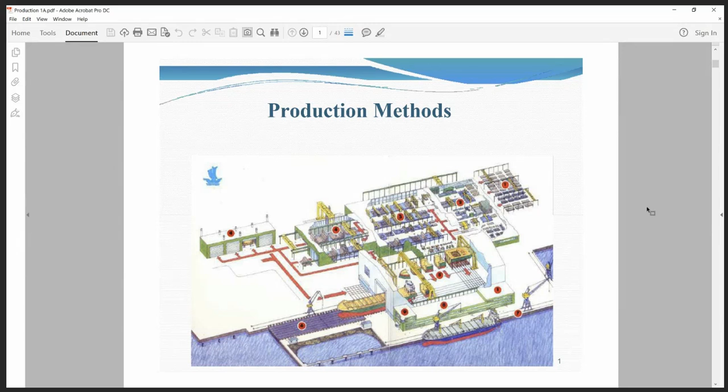This is much more about the production unit. So what we will discuss today is much more the production unit than really the design and calculations of the ship. I will give you a small overview of the economics context, the type of shipyards, the launching system, meaning how we can put the ship in water, and the method of construction and the technological evolution of the construction.

Concerning the shipbuilding industry, it's consuming a lot of manpower, and some of this manpower is not skilled, and some is skilled. About half of this worker, this manpower, have a certain skill, and the rest is just only a worker.

Actually, there's a tendency to delocalize the construction. Why? Because, as I told you, this industry consumes a lot of manpower, and the manpower represents a big part of the construction of the ship. So people are trying to find where the manpower is less expensive, with some skill - the skilled manpower - and then they delocalize the construction there.

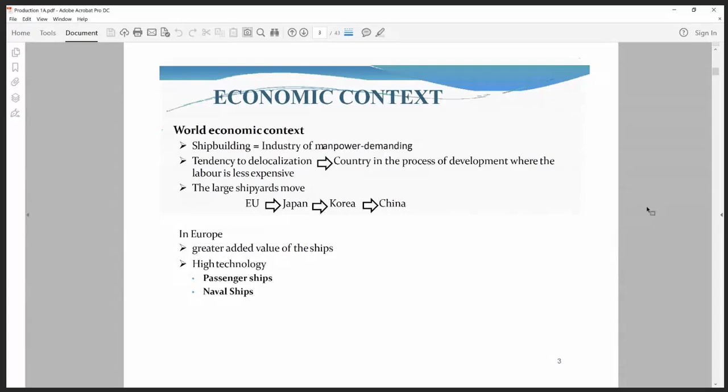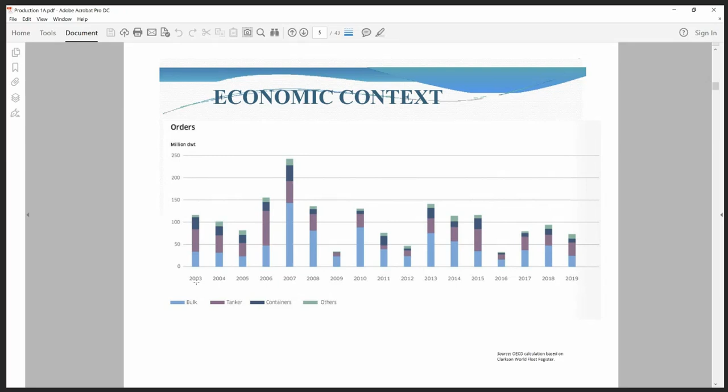We can see that the majority of ships built up to now are bulk carriers, tankers, and a small part containers and other ships. The biggest market is for the bulk carriers and the tankers.

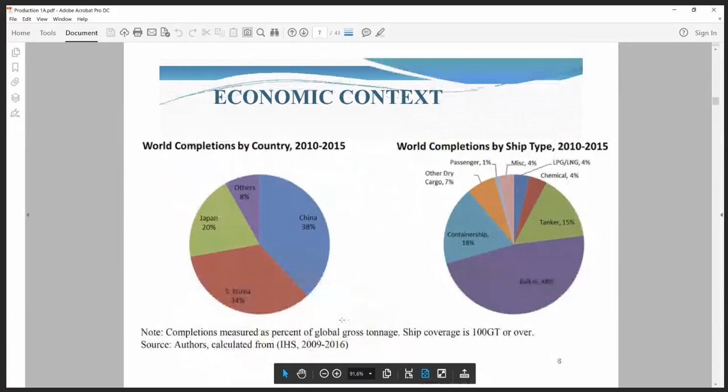So you can see that the majority of passenger cruise ships continue to be built in Europe.

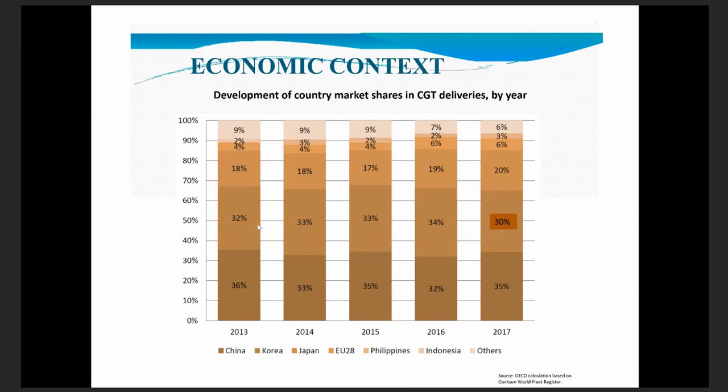We can see that the major part of ships for transportation, bulk carriers, crude oil carriers and so on, are mostly built in China because they have the larger market. They also have lower costs, less expensive than other countries, which is the reason why they have a lot of the market.

It's equivalent to the same ship built maybe 10, 15, or 20 years ago. The only new things might be the navigation materials and some small details, but the form, the way to build it, or maybe a slight increase in capacity, stays exactly the same. It's not really completely new technology inside those ships.

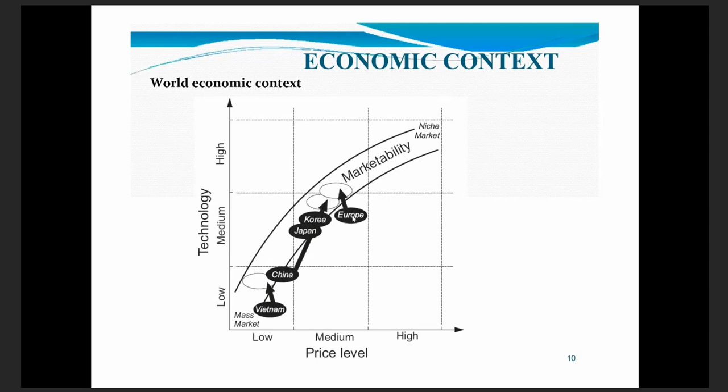That's the reason we are at low prices and low technology. In Europe we are at more medium prices and more or less high technology, and also in Korea, because now with Japan they are starting to try to build passenger ships and LNG ships, which are a bit more technological than bulk carriers.

So for shipyards, we have different types. Shipyards can be classified according to geographical situation, according to the size of ship we would like to build, according to commercial and industrial objectives, and also according to the qualification of labor that we need. This will show the type of shipyard and its position in the world.

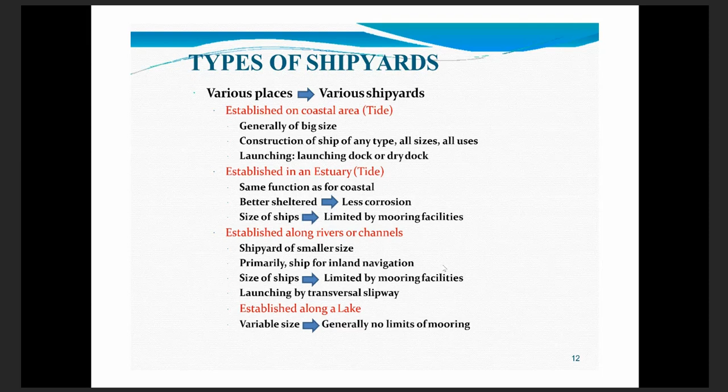The shipyard, you build the shipyard according to the ship that you would like to build. So it's mean you need to have, if you would like to build larger ships, the devices to be able to build larger ships. For example, the lifting capacity. The lifting capacity is really a crucial point for the shipbuilding, and also for the economics. We need to have a very good capacity of lifting.

Why? Because we will see it later, this capacity of lifting will help us to make the biggest blocks. And when we build your ship, you build it with different blocks. If the capacity of lifting of these blocks becomes bigger, it means you will decrease the number of blocks. And if you decrease the number of blocks, you will gain time, and you will have the possibility to do the work faster than if you have double the blocks. So we will see what it means, blocks, later in this presentation.

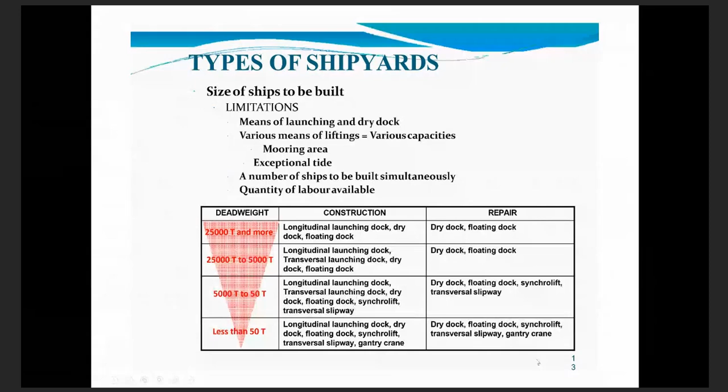So we will see all these devices in just a few slides. The commercial activities that make profit to build the ships - for that, we need to have a great quantity of work. Sure, it's normal. To be able to invoice the cost of the labor, very high cost of labor.

This is, if you want, our problem here in Europe in general. Receive more frequent grants. And what it means is that in some countries they give grants, if you want, to the shipyard, but here in Europe we are not able to do it because we have the European law, which is very complicated to do it. But some countries do it in a different way.

For example, in Italy, in France, they give, if you want, the grants to the shipyard by building a naval ship, because Fincantieri does the naval ships for the Italian Navy, and at the same time does commercial ships, passenger ships or something else. That's the reason why the Italian Navy said all the military ships should be built in Italy.

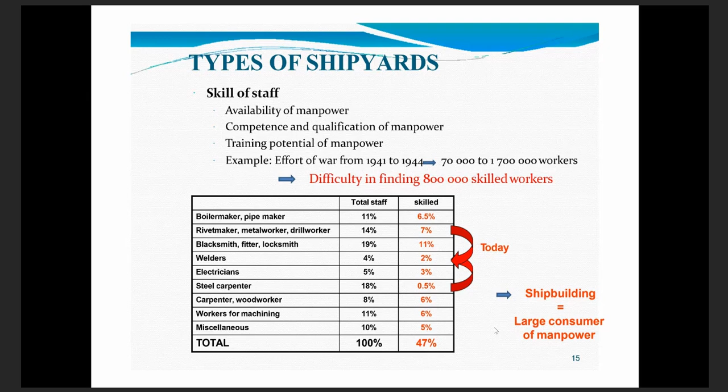And now, as I told you, we have 4 points. The first one, the localization or the geographical position of the shipyard. The second point was about the capacity of building: if you would like to build larger ships, smaller ships, and how many ships you need to build at the same time.

The third point was the commercial objective of the shipyard, and the fourth point was about the skilled people, or the workers working in the shipyard. And so I explained the different points of view about these 4 points.

And now we will go into the layout of the shipyard, how we will build and how we will organize the shipyard, and how shipyards are organized. So we can see that, for example, if you have a restricted water frontage, the shipyard is a straight line flow, because the water frontage is very small, and so it means all the flow of materials is in a straight line.

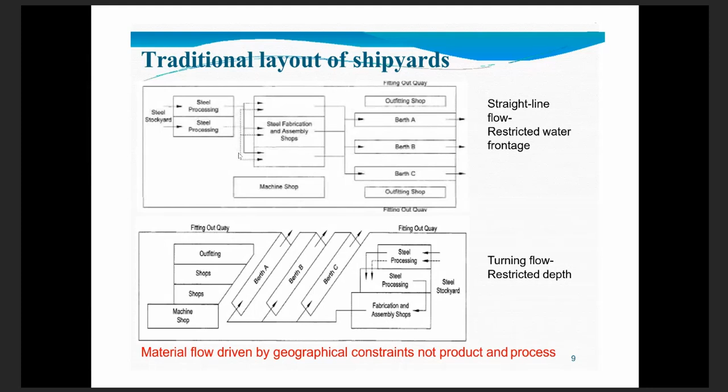So this is in Sweden, and this shipyard is designed for a straight flow of materials. And how is it straight? You can see that the stock is somewhere here. You have the shops here; these are the shops to make the elements, panels, and blocks. And then you have the berth, and then you can put the ship outside the berth here. So this is a straight shipyard. You can see everything is in line.

Okay. So this is the shipyard in Sweden. And in Japan, the majority of the shipyards, don't ask me why, have the T layout or U layout. And what does T and U layout mean? For the T layout, it means you have the outfitting all the time near the quay. Okay.

So you can have here the steel stockyard somewhere here. After that you have the shops for assembly and fabrication, and then you have the machinery shops, and also some part of the outfitting, and you can see all of them. The outside part is perpendicular, if you want, to the berth.

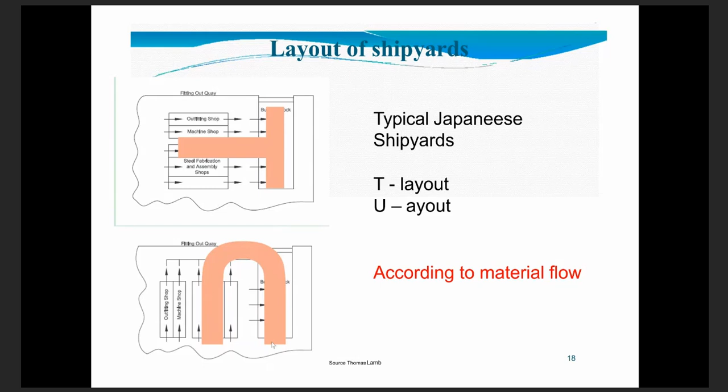But for the U profiles, you can see that they have the U. Why? Because if you follow the arrow, we can see that the flow is forming a U. So it means you have the flow, and then you turn, and you have the berth here. It's perpendicular. It's a U layout. So it's these two layouts, according to the material flows.

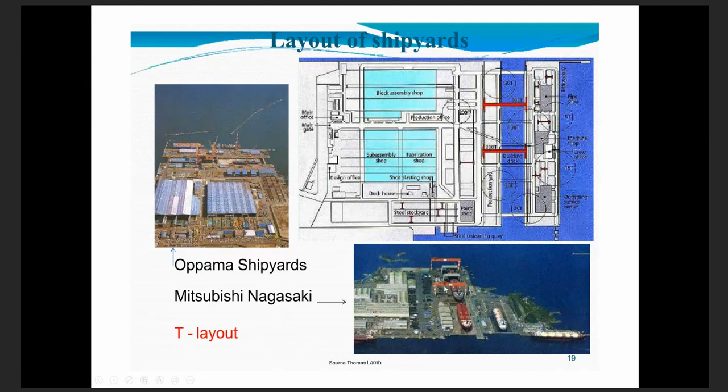And here exactly the same. So you have the shops here, and then you have a berth here. It's also a T layout.

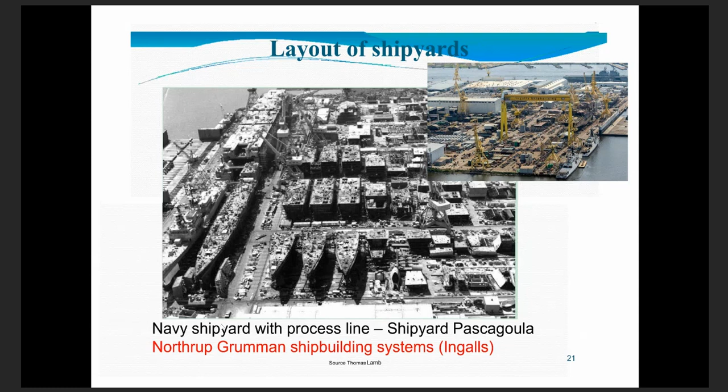As I told you, the ship will be built by blocks, and with the compact shipyard, when you finish the blocks they are directly sent to be assembled in the dry dock. So it means you don't have the possibility to leave them a long time outside the dry dock.

Also, the advantage of such a compact shipyard is that everything is connected together, so the worker doesn't need to go outside to do their work, which is a very good thing. Why? Especially when you have bad weather, for example in the north of Europe,

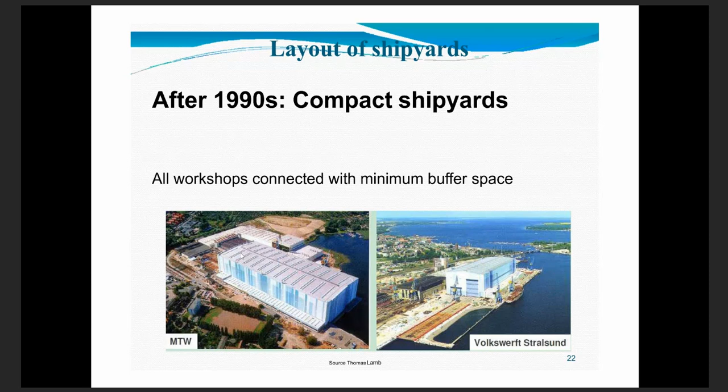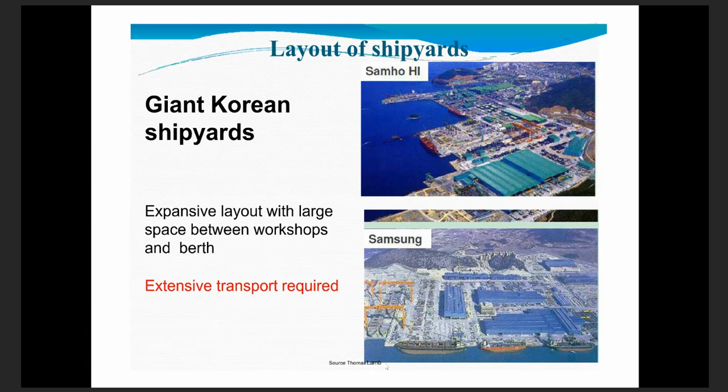And all these shipyards are very large, and extensive transport is required. They need very extensive transport. Why? Because you have a very long distance between the shops and the berths. But I think they are very efficient shipyards, and they are able to deliver 3 or 4 ships every month.

Okay, now we have already seen the shipyards, the layout of the shipyards, and now we would like to see, as I told you, the launching and setting dry of the ship in the shipyard. I told you that you have what we call irreversible devices and reversible devices. Irreversible devices mean that you are not able to take the ship out of the water. You can put it in the water, but you cannot take it out of the water. So this is what we call irreversible devices.

Okay, the longitudinal launching is an irreversible device, and transversal launching is also irreversible. For reversible, you have transversal slipway, dry docks, floating docks, Syncrolift, and gantry crane. And now I will explain each device and give you the advantages and disadvantages of each device. For the irreversible devices, that means the longitudinal launching. So you can see what it means.

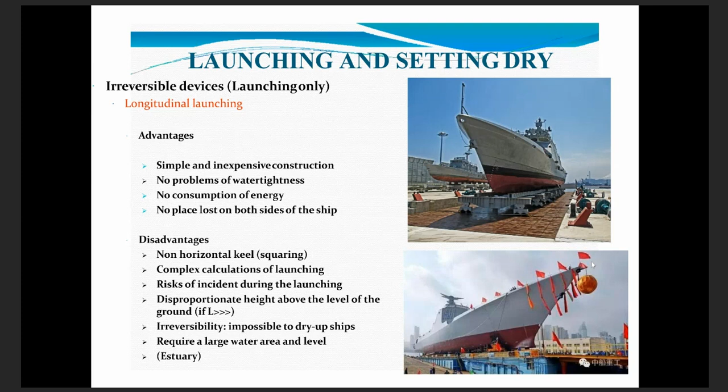And so you can use this kind of system when you are in the estuary. You cannot do it in the coastal area, because you also have waves, and the waves will complicate the launching and increase the risk of accident. So this is the reason why we use such devices only in estuaries and not really in coastal shipyards.

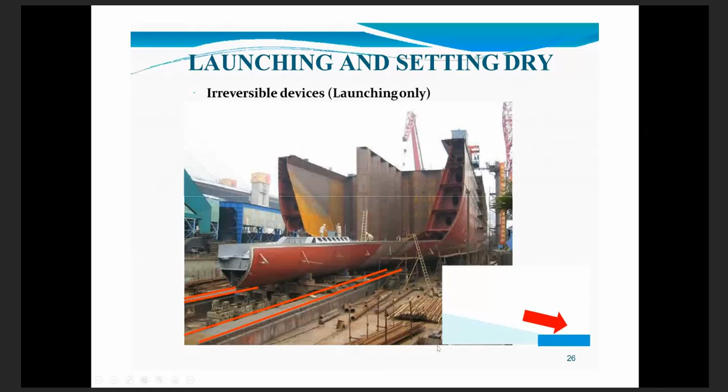Okay, these are the rails in red, and you can see we build the ship on the carriage on the rails, and then we release the carriage when we finish. This is the ramp in blue, and this is the water. So the ship is entering the water, and you can imagine that part of the ship is in the water and the other part is on the longitudinal launching, on the longitudinal inclined plane. Okay.

And now we come to the reversible devices, what we call the slipway. The slipway, what does it mean? What are the components of the slipway? The first component is the ramp. The second is the winches. You can have 1, 2, 3, 4 different winches according to the capacity of lifting. And then you have what we call the carriage.

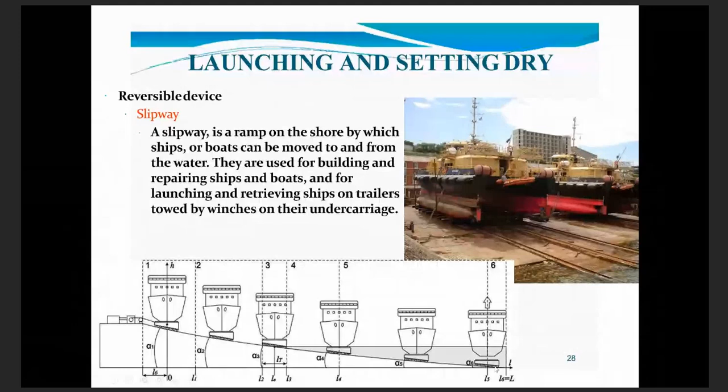So the disadvantage is the energy consumption, because you need winches, and maintenance of underwater tracks. Don't forget that this rail continues under the water, you see the water arrive here, and the rail continues under the water. As I showed you in the previous photos, the rail continues up to here, and sometimes you need to make maintenance of this rail because it's under the water, and it's very complicated and costly to do it.

So you need to maintain it, especially when sand comes onto the rails. At this time you need to clean the rails very often. There's also limitation due to loads to be raised. As I told you, generally it's not really done for larger ships.

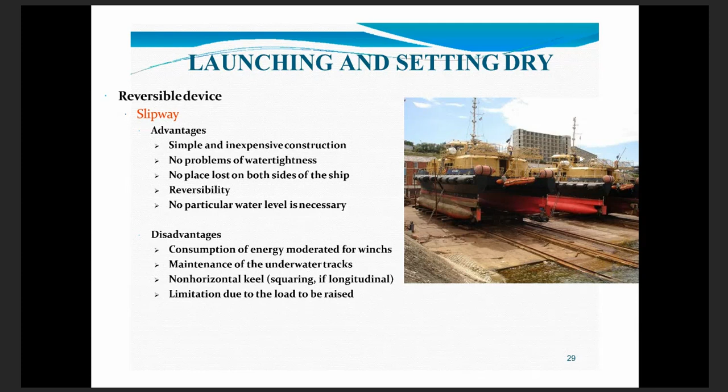It's also a very old shipyard design, but it exists, it's very old, and I never seen a new shipyard with this kind of device.

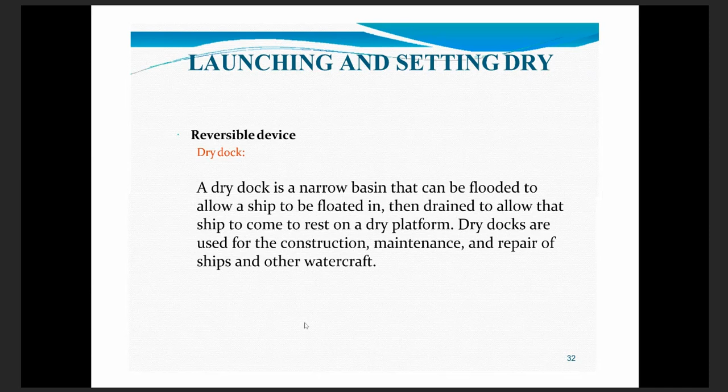And when you are building a new ship, it's equivalent to what you do: you fill the dry dock with water, and you open the doors, and the ship goes out directly.

So for the dry dock, the advantage is reversibility. It's reversible, no limit of load, because for the dry docks you can have a ship of 400 meters or more, maybe 100,000 tons. It's no problem, because it depends on the construction and the possibility of the weight, so there's no problem for these limits of load.

It can take several boats at the same time. Yes, because if you have a very long dry dock, maybe 300 or 400 meters, you can close a part of this dry dock. You can start to build one ship, and then build another ship in the second part. So the problem is just a logistic problem.

You need to finish the first ship, take it out, and then be able to take out the second ship. So it means you need to organize logistics.

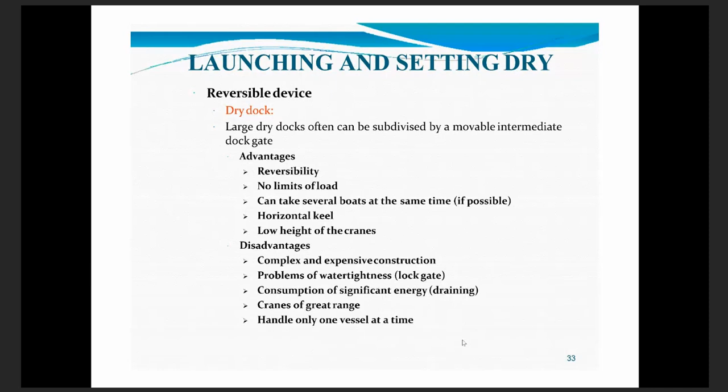Handle only one vessel at a time. If you are on the dry dock building a ship, you cannot completely block the dry dock, open it and then take another ship and close it. No, you need to finish the ship completely, and then you can fill it with water and open the door. So if you are doing new construction, you will block your dry dock maybe for 1 year or more without opening the door, because you cannot open it while your ship is in construction. So the reason is you can only handle one ship at a time - you cannot use the dry dock during the construction of a ship.

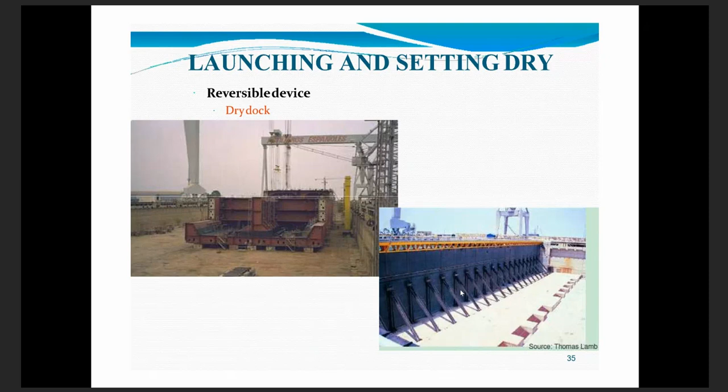This is the separation - when you have very large dry docks, you can build two ships at the same time, and this is the separation within the dry dock.

The floating dock is a little bit different because it's a pontoon for drying the ship, possessing floodable buoyancy, and chambers - it has the form of a section with U sections. This means when you would like to use it, you fill this pontoon with water, and the pontoon will sink, then the ship enters between the two U elements, and then you deballast - you take the water out, and the ship moves up, raising the ship at the same time.

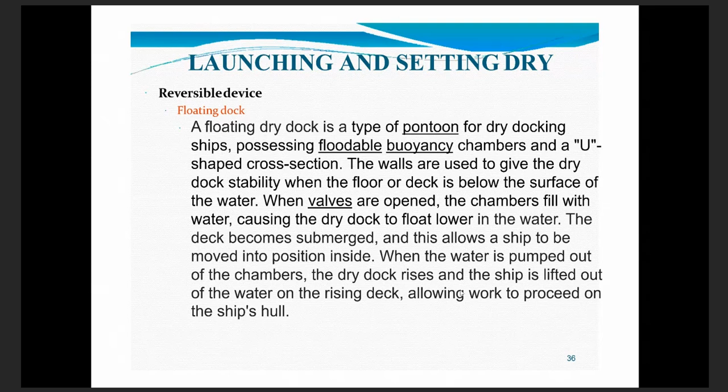So this is the dry docks. The problem, or disadvantage, is it's reversible - if you would like to put the ship back on the water, you fill the ballast with water, and the ship will sink, then the ship can go out. Exactly the same for another ship entering - you empty the ballast, and the ship moves up and is lifted at the same time.

The mobility is very easy because today you have it in one point, and if after two years you would like to move it, you can move it maybe 20 or 30 or 100 kilometers from the first point - no problem. You do it by tugboats, and put it wherever you want. This is the advantage of the floating dock versus immovable dry docks - it's much easier to move and change the location and positioning.

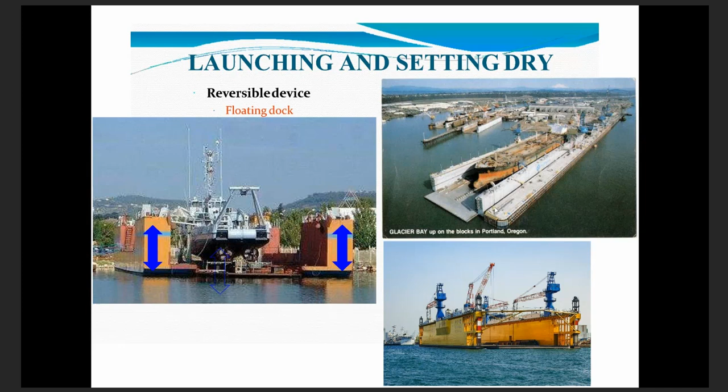And when you need to have the ship outside the water, this platform will move down. The ship enters, and when the ship enters onto the platform, you can lift the complete platform with the ship, and then you have the ship in a dry position. Then you can move it after that because the ship is on the carriage. If you would like to move the ship outside the Syncrolift, you can move it outside. You make the reparation, maybe during 2, 3, 4, 5 months of work, and then you bring it back to the lift and put it in the water.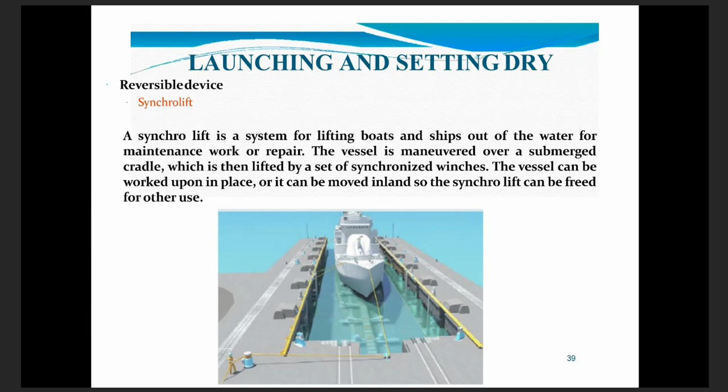The idea is that if you want to be able to move it out of the Synchrolift, it's just to have the Synchrolift completely free all the time to use it for other ships. So this is the Synchrolift - you see the rails here. The ship is on the carriage, so you can move the ship onto the earth here, work on it, and then bring it back to the Synchrolift to put it on the water. Here you have different elements - this ship is in the Synchrolift, and this one is outside the Synchrolift, because after that you can also move it transversally by changing the direction of the wheels.

The advantages: horizontal keel, less expensive than the dry dock and the floating dock. No problem with water tightness, because you have nothing except the carriage which is in the salt water, but the rest of the mechanism, the winches, are outside. So there's no problem of water tightness.

Disadvantages: requires very resistant foundation, because it depends on the capacity of lifting. Bad accessibility for the crane - there's no way to put a crane because all this construction is in the water, so it's impossible, or at least it's costly, and there's no way to have a crane on this area. It requires maintenance of the winches. The maximum capacity is 30,000 tons - this is the maximum lifting capacity.

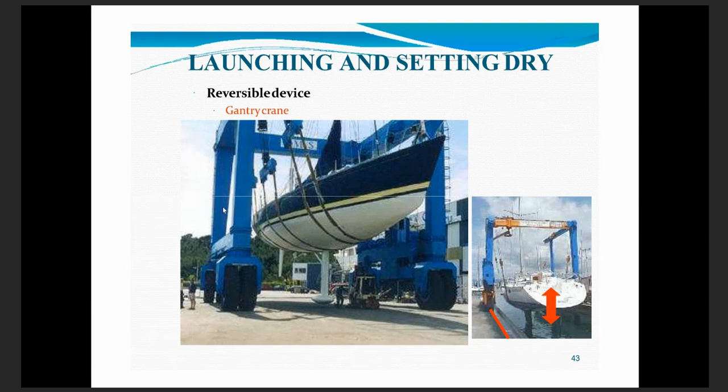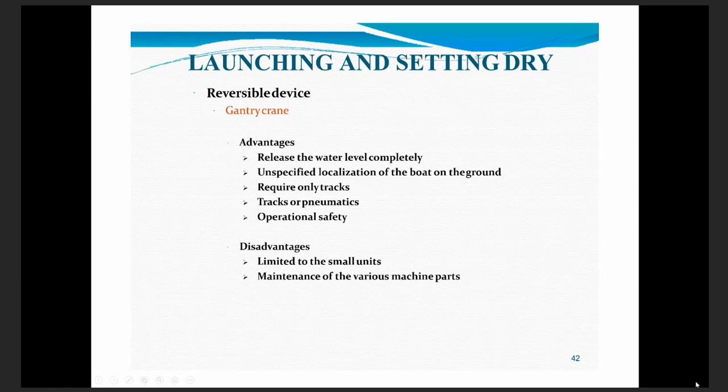The disadvantage is it's limited to small units. You cannot lift very large units. It's maybe 15 to 20 tons maximum. Maintenance of various machine parts, because it's like a car, so you need to maintain the system mechanically. Okay, this is just an overview of what we discussed about the reversible devices.

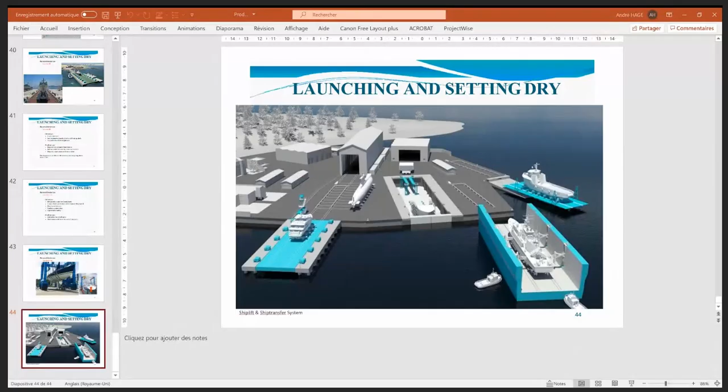Okay, now I will move to another presentation where we talk about... where is it? Oh, just a minute. Okay, remove this one. Yeah, this one. Okay.

Generally, when you finish the hull structure and the propulsion, line shaft and propellers, you can put the ship outside the dry dock, and you do all the other outfitting directly outside the dry dock, on the quay.

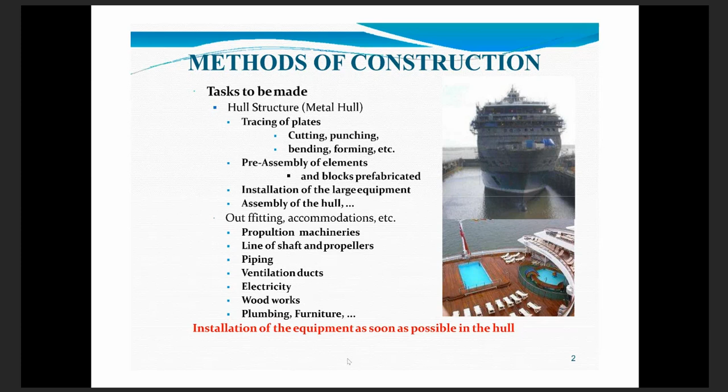After 1970, block construction arrived, and the use of computers allowed you to stop using optical tracing by projection. Now everything is done by computers, automation and optimization. So this is the evolution of shipbuilding. We started with riveting and longitudinal launching. After the Second World War we started welding, and the hull continues to be welded, but optical tracing is now replaced by computers and nesting, and we will see what it means.

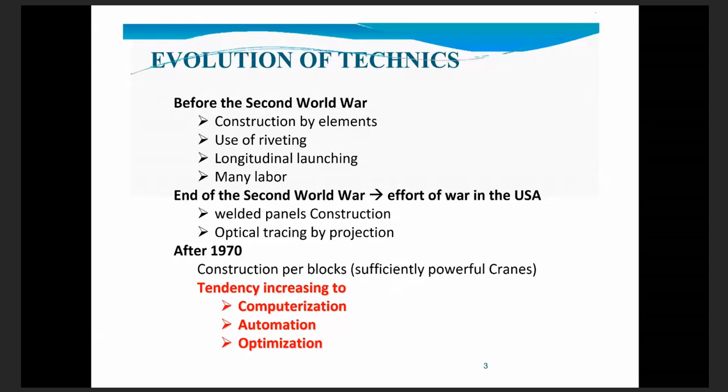This is just to give you, some of you maybe know about the riveting. What does riveting mean? Riveting means that you have two plates. You make a hole between the two plates, and then you put the rivet, and then by using a hammer, you can close the rivet.

And how does the rivet work? Before you put it in the hole, you need to heat it up to maybe 800 degrees or something like that. You put it in the hole. You use the hammer to make the rivet take this round form. And when the rivet becomes cold, you will have a retraction, and then it compresses the two plates together.

So you can see, but for the passenger ship, it's more. For the hull, it will be probably 50% of the cost or a little bit less, and the rest is for the other things on board the ship. So it means it's completely different. The reason why we continue to do this kind of ship is because the technology of the passenger ship is much more complicated than the technology for the bulk carriers.

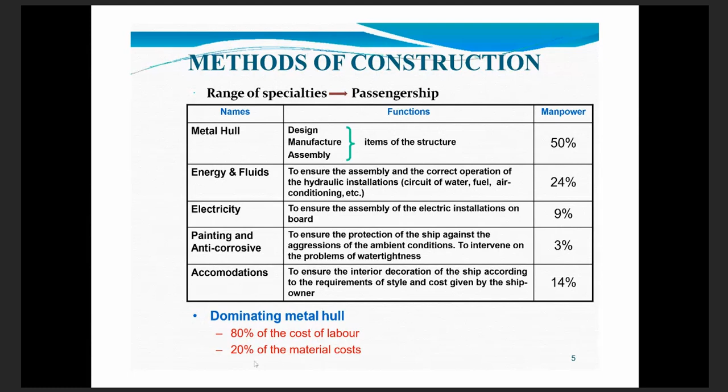In Belgium, in Europe, for the welder, it's between 35 and 40 euros for 1 hour, and probably you will pay maybe $20 or $25 a day in China or in India. I don't think they have arrived to 20. It's probably less than $20 a day. So it means 1 day of work in those developing countries is, according to what we pay in Belgium or in Europe, 1 hour of work. So you can see the difference when you have a lot of steel work to do. So you gain a lot of money.

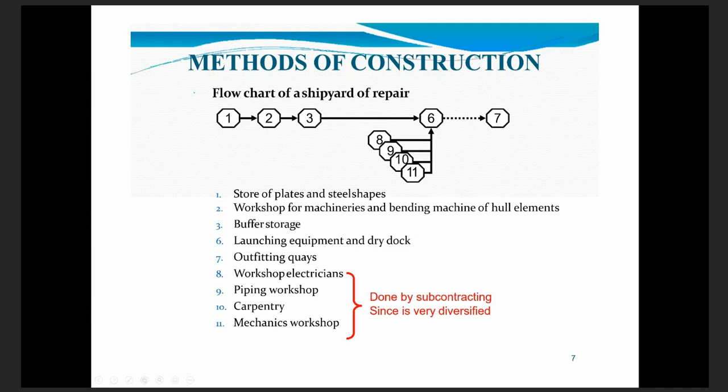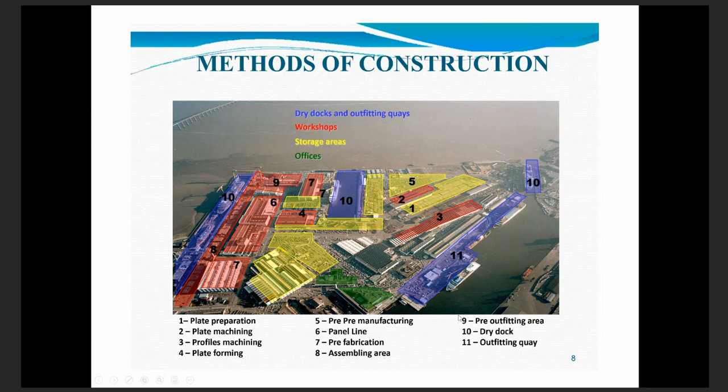Okay, this is the general layout of the shipyard. We will see exactly the same elements as I explained for the layout, but also according to the flow chart of the shipyard. So you will see exactly the same, but here with photos and the areas on the photos, just to show you the different areas and how the shipyard in general is.

Now this is very important, as I told you, for what we call the pre-manufacturing, where you will have all the elements here. It means you have the plates, you have the profiles, and then you assemble them to have an element. An element, what does it mean? It means that you have a plate plus the profiles, and then we call this one a

pre-manufacturing. When you have the panels, it means you have the elements, you assemble the elements between them, and you will have the panel. And when you assemble the panels between them, you have the block. When you assemble the blocks between them, you will have the ship.

This is how the construction of the ship works. You have plates and stiffeners. You can make an element. From the element you make the panel, from the panel the block, and from the block you have the ship. These are the steps of the construction of the ship. And now I will show you in drawings what it means.

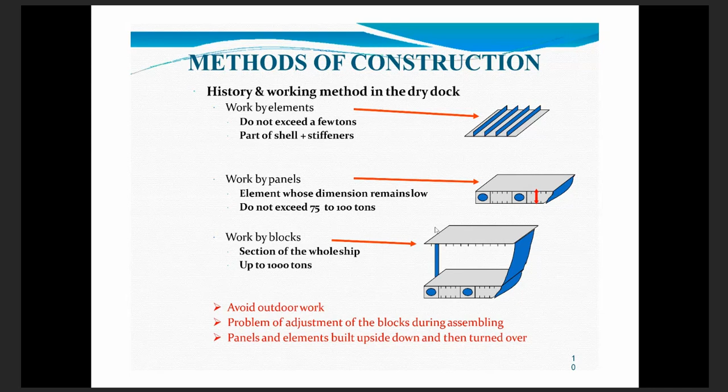Now, when you build the ship with the blocks, you need to adjust the blocks between them. Okay, so it's very complicated. After that, this is the block splitting for the bulk carrier. You see the number of blocks to build the ship.

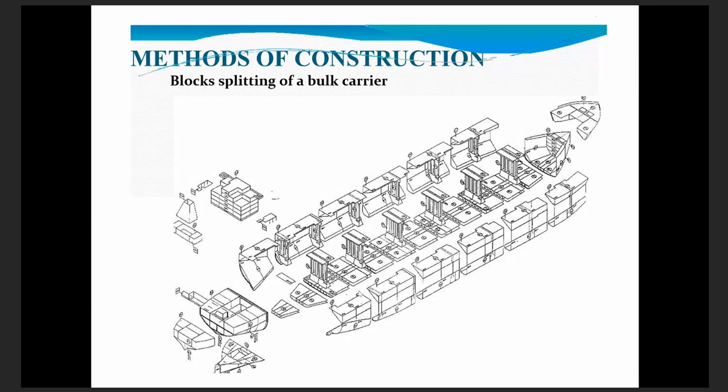If you say, I need to use the plate 6 meters length by 2 meters width, the computer will place all these elements, and we send the file to the cutting machine, and the cutting machine will cut all the elements, putting all the numbers on the pieces. Then the design office will send to the worker the bulkhead here, for example, with the name of each element and the way to do it.

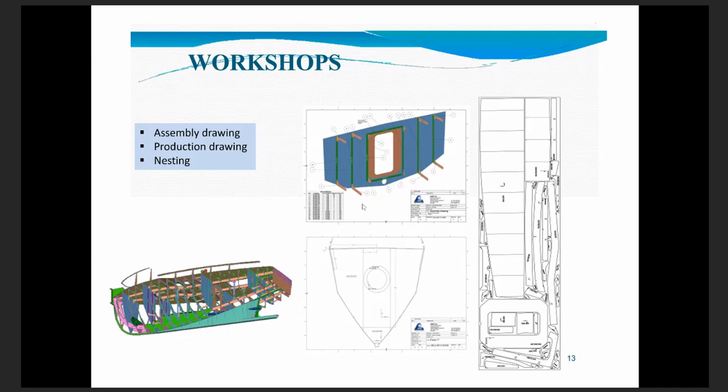Oh, this is the cutting machine, the plasma cutting machine. The plate is under the water to avoid the gases and the noise. We use this water; the plate is inside. We see on the drawing here some cut plates. And this is what the computer sent to the machine and what the machine cut.

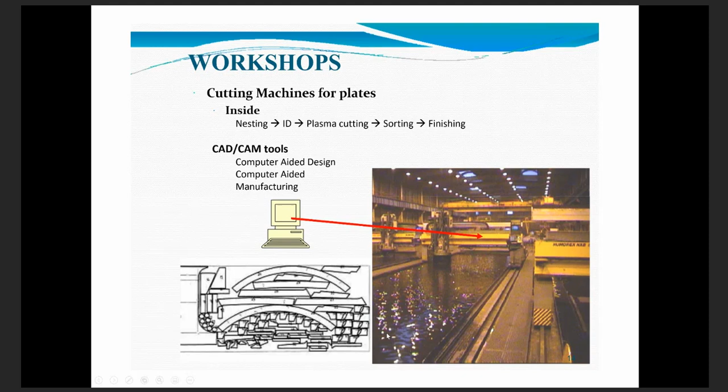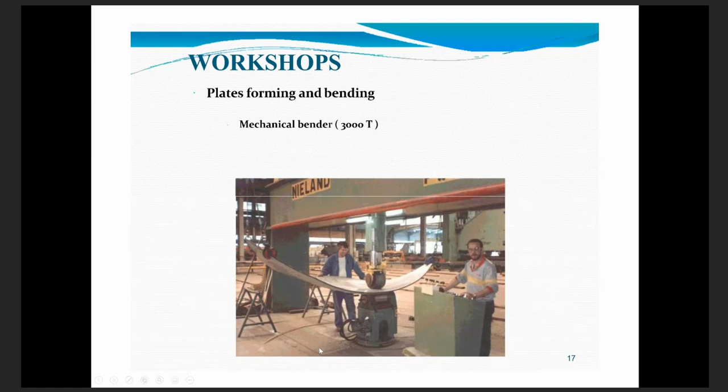This is the bending of the plate. This is the mechanical bender with 3,000 tons, just to bend the plate before putting the stiffeners. Or this is the pre-manufacturing. You have the plates and the profiles, and the welders just fix the profiles on the plate, and then the robot will continue the work.

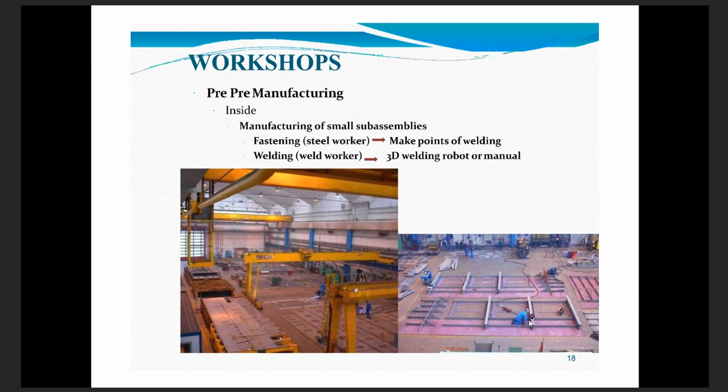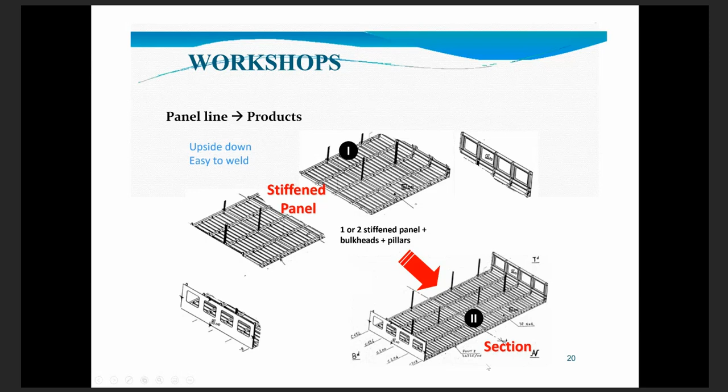So as I told you, in the panel lines we produce the plates. On the plate, we put the profiles. And from this element, we prepare the panel, and after that we do the blocks. Why do we do that? Because we have to facilitate the welding. If we see the plate thickness according to the cost by hour, we can see that overhead welding is much more expensive than flat welding.

It's much easier. It's equivalent to when you are painting at your home. It's much easier to paint the floor than to paint the wall, or to paint over your head. So that's the reason why we try to do exactly the same for the welding.

The element you do on the ground, you weld everything flat on the ground, and then you assemble the panel, also on the ground. And the blocks you also try to do on the ground. I will show you how we do it. For example, if you would like to make the deck with the bulkheads, you do it on the ground, and then you turn it and weld it upside down. So you weld everything flat, and then you turn it.

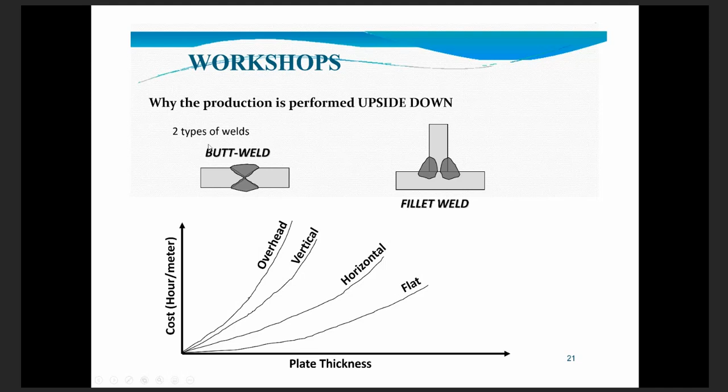Don't forget the cost of this element. Flat is much cheaper than horizontal, than vertical, and then overhead. The same goes for the butt welds for the plates. This is what we do. This is the deck, it's on the flat. We put the bulkheads, and when we finish, we turn it, and I will show you the machine.

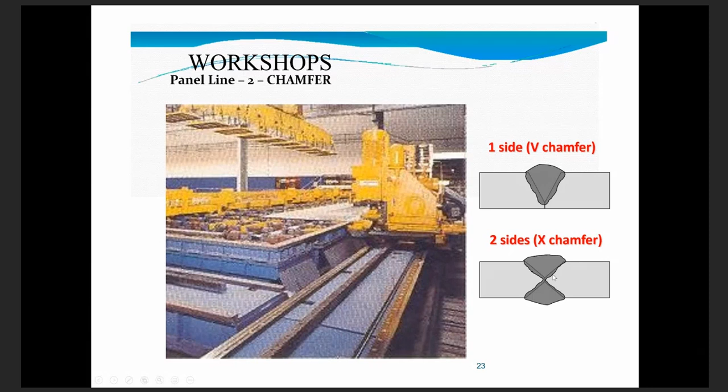Now, this is if you want the machine for the chamfer, because if you want to make a welded on X, you need to have a chamfer like this one. You weld on the first face, the first weld, you turn all the plate, and you weld the second one after. So I will show you how we do it.

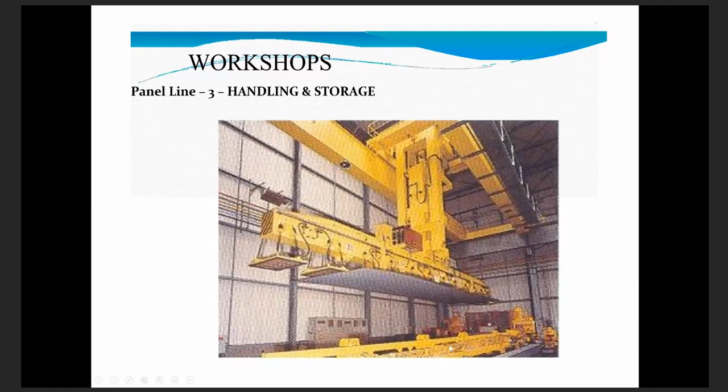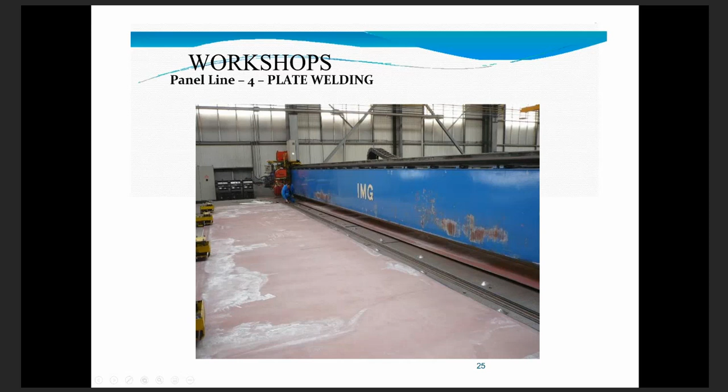This is just to deliver the plates to the line panels. Here you will see the guy with the robot preparing to weld this plate on one side. This is the first welding on one side done by the robot. Then this is a different plate, plate 1, 2, 3, and this machine turns all the plate to weld the second side when you have the X chamfer.

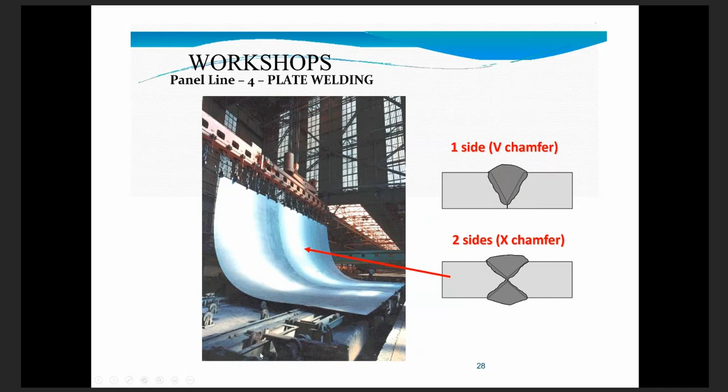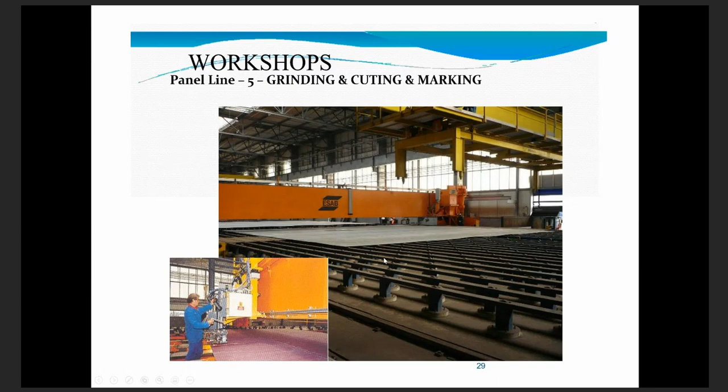Okay, so this is the machine. We are here, you turn it if you want this plate. Now you have the plate welded on both sides. You have different lengths, 3 or 4 plates welded all together.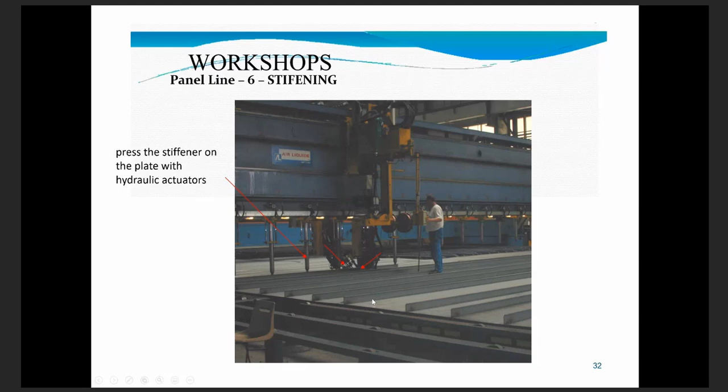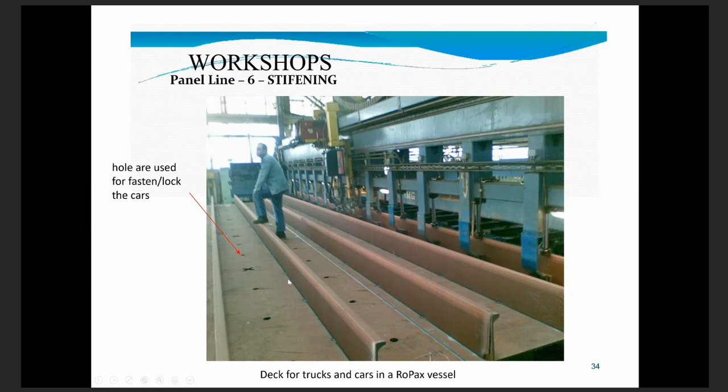Oh, this is the robot. This is just to show you how one of the robots is putting some points, and then another robot will do the complete welding along these stiffeners.

This is how to fix the frames on the deck. This is a deck, not the bottom. It's the deck, and then you see here you have the bulkheads. Okay, now we are doing the deck here.

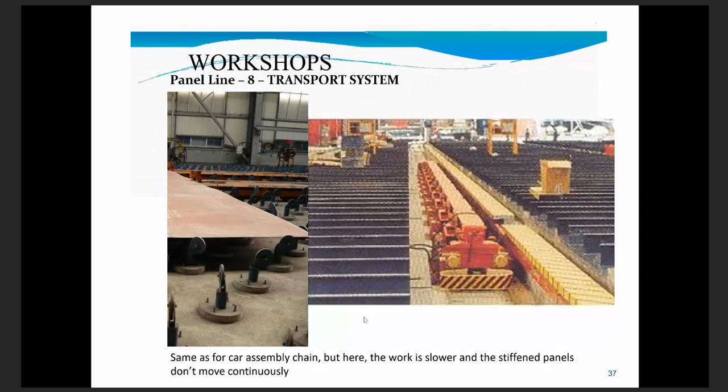And then this is just the panel line, so the plate plus the profiles. This is the sub assembly. You have the deck, you have the bulkheads here, everything done.

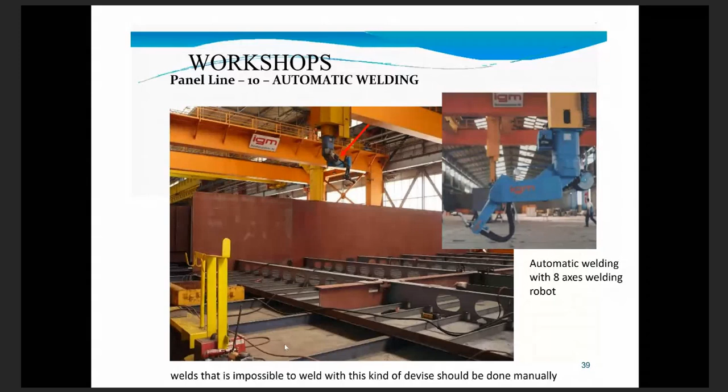This is another view of the robot working. You can see here 12 robots working just on the double bottom. You see the double bottom here, and this is the robot. You have 12 robots working on the double bottom.

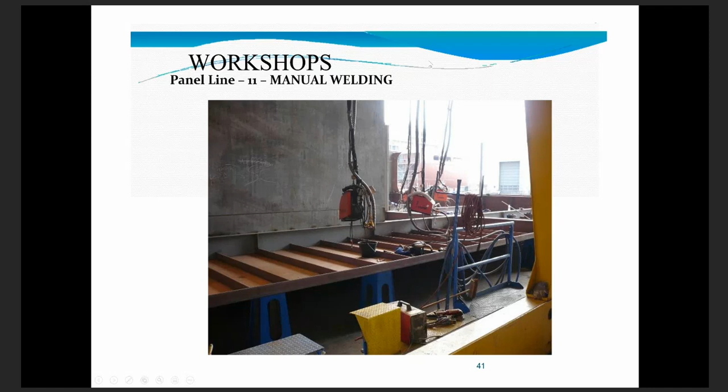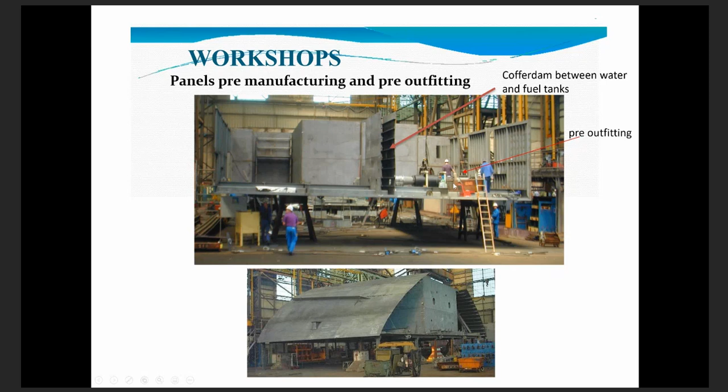Or this is the complete big panels. Why? Because this is the deck, this is the bulkheads, this is the cofferdam, and we assembled some elements. You can see this is, for example, the pre-outfitting. Probably it's maybe the exhaust gas.

And this machine is to turn it up and down, to turn the device. This is bolted on the floor, and then when you finish everything, you turn it and put it directly on another deck.

So you can see all the work here is already done flat on the ground, meaning flat welding. So now what he will do when you put it again to make a big block, a blocks, you just need to weld it to the structure of the deck. So it's much easier, and you gain a lot of time because all your work is done on the ground.

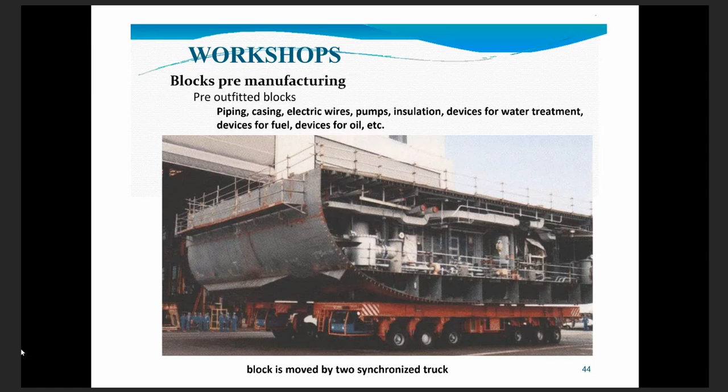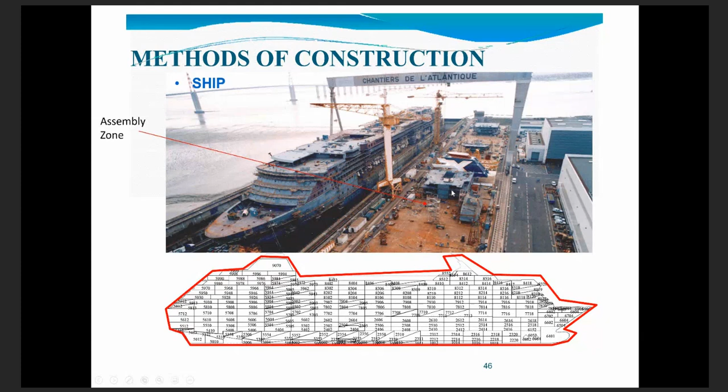This is what we call the assembly zone. So it's meaning this crane, the big crane, will take this part and put it on board the ship.

Or this is some blocks, and then here also you can see the blocks. Here you have different blocks showing different blocks, and this is the manner in which you work. So it means you have the blocks and you start to assemble them, and you have a manner to assemble. You cannot do it as you want.

It's done step by step. So you can see here, this is one block, equivalent to the bulbous bow. And now you can see this is the complete shape according to the number of blocks that you have.

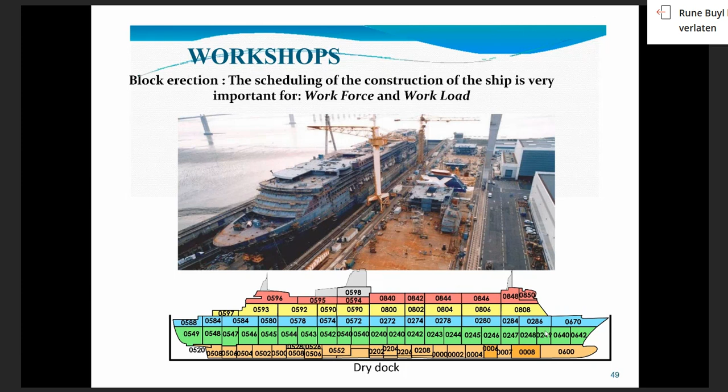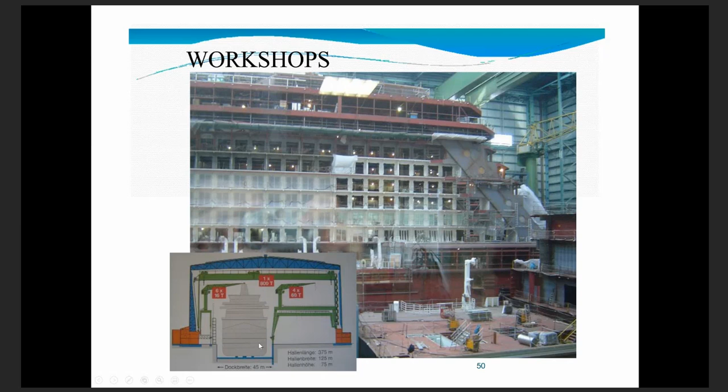And then when you finish completely the ship, they open the door, the water comes inside the dry dock, and the ship can leave the dry dock.

So there's a lot of problem of distortion. This is the main activity of research in shipbuilding - to see how to decrease distortion of the plate, because it's very complicated when you assemble two blocks. You need to work on this part before assembling the blocks, so the shipyards are interested in how they can decrease distortions.

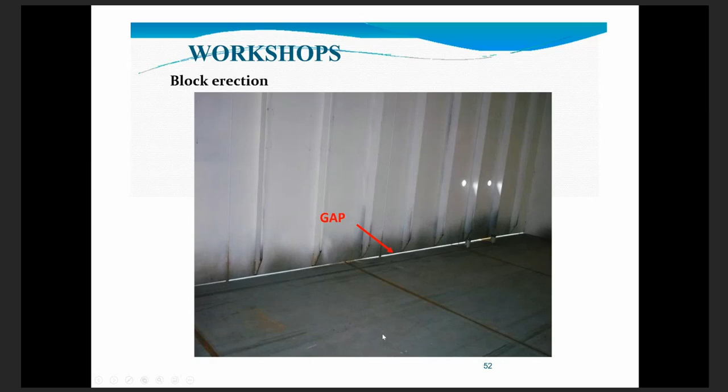Another problem is the block erection. You have a gap, and before welding you need to decrease the gaps as minimum as possible, because if you have 1 or 2 centimeters of gap, it's impossible to weld. So you use a jack to compress these two elements together, to be able to weld it. As you see here, we use this jack just to connect two blocks together.